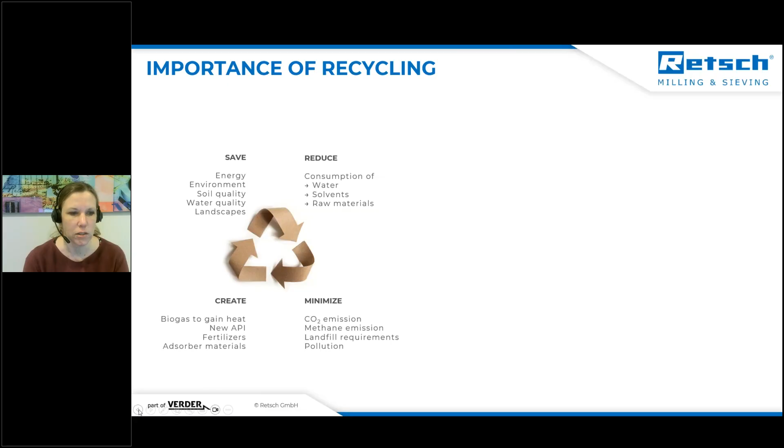The importance of recycling, I think, is clear. We have the aim to reduce waste and the consumption of water, solvents, and raw materials, to save energy, environment, soil quality, and landscapes. We need to minimize emissions, carbon dioxide, pollution, and landfill requirements. And of course, we'd like to create something new, new APIs for example, or new adsorber materials, and maybe we can also use biogas to gain heat. So the aims of recycling are very versatile and very urgent, I think, and it's a very interesting topic.

Where Retsch comes into play is when we need to analyze waste material. We need to homogenize it for quality analytics, quality control. This might be sieving, or it can also be, for example, a determination of heavy metals. And as soon as we know the material is okay for reusing, we need to crush larger sample materials, and here we also have some solutions for homogenization of the sample materials in larger scale.

Here we can see the topics of today: homogenization, standard deviation, the correct analytical values. Then I'd like to show you how to find the optimal method, the optimal mill for a specific sample. Suitable laboratory mills for homogenization, also for larger sample quantities, I will show, and then we will switch over to the demonstration of some of those mills in our lab. After that, we will have many application examples for best practices before we go to talk a little bit about sieve analytics.

Not in each detail—there are other webinars you can listen to where this is in focus, but maybe a short glance to this. And of course, also how to press a stable pellet for XRF analytics. And one slide on how Retsch mills can be useful in scientific purposes. And of course, if there's still time, some questions at the end.

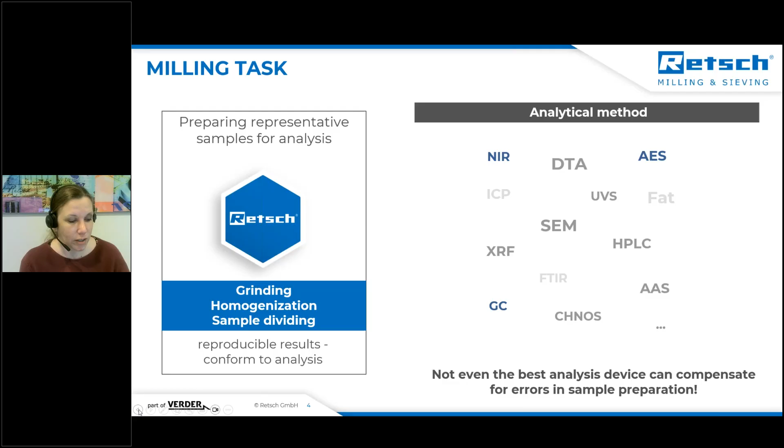And if you do not do this correctly, then you can put in as much money and time into your analytical device, but the results will not be that good. You cannot compensate for errors made in sample preparation with a very nice analytical device. So we know we are at the beginning of all these quality control steps, but it's required and necessary, and hopefully I have some slides to show you why.

For example, we have these Lego bricks, toy bricks, and now the goal is to get only a few, or a little amount, for the analytical task. If we do not grind it, then maybe we select to take a red one, but the red one might be of another composition than a green one, and so the result will not really be reliable, not representative for the complete sample, and also not reproducible.

So we need to homogenize it to mill it. And when we have this coarser fraction, if we take some milligrams, maybe this is okay. So we can try to analyze it, but maybe we have more green particles than yellow ones, or more blue ones in it. So it's really not that homogenized as it could be.

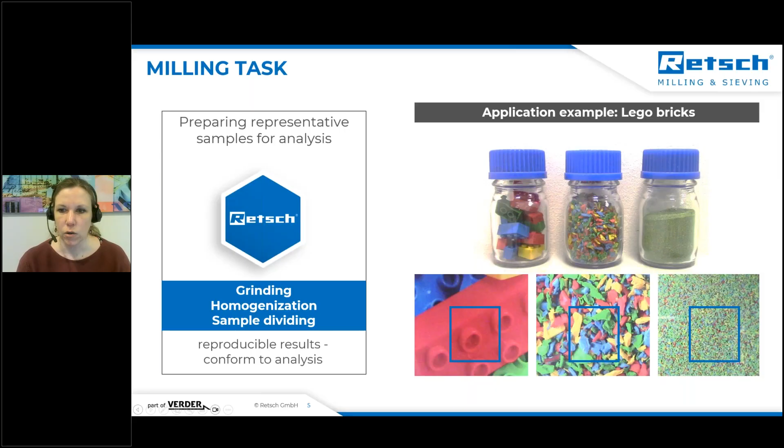As soon as we have it pulverized, it is completely independent where we take our few milligrams. The composition is always the same and contains the same amount of red, green, blue, and yellow bricks, and it is reliable - it really represents my original sample. So grinding and homogenization is really crucial to get reliable results in the end.

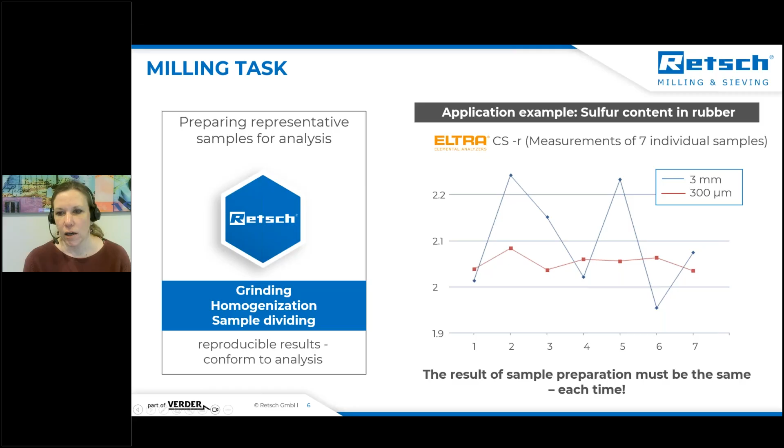This can also be seen in this example when we analyze sulfur content in rubber. We ground it in one experiment to 3 millimeters, shown in blue, or 300 microns, shown in red. We took different part samples and analyzed them. You see that the blue ones vary much more in the sulfur content. So this is not enough homogenization, obviously, because we get a higher standard deviation and more varying results.

It's not reproducible, so proper grinding shows good results in the end. We often get the task: okay, how fine do I need to grind my sample? And this is not the right question. Not as fine as possible, only as fine as needed - this is the really right question, because when we only need about 0.5 millimeter size to get reliable results in the end, then there's no need for grinding much more.

Then it's only wasting your time, your money, and maybe also your machine, through abrasion. So only as fine as needed, and not as fine as possible. The finer you like to get the particles, you need exponentially more time to create those.

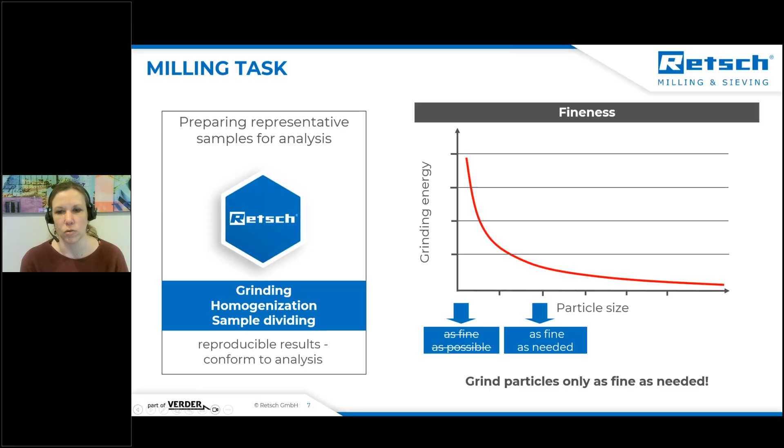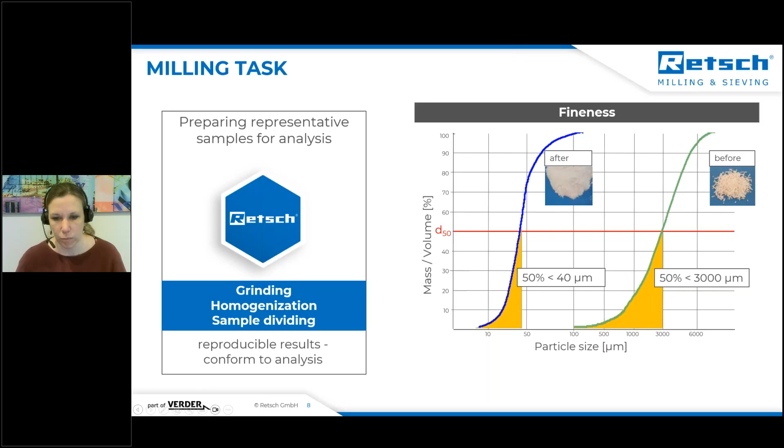And this is abrasion - we cannot avoid it. We can only choose the material of the grinding tools so that they do not disturb the following measurement.

This is also true for example for temperature increase, or heating the sample up front. Then we can maybe grind it easier, but if we like to analyze for moisture content, then heating is not good because it falsifies our results.

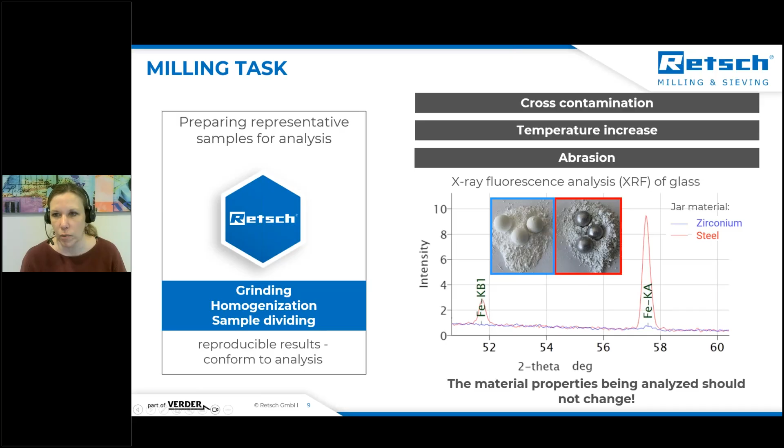Then I'd like to also show you how we can grind particles. We use 5 grinding principles. For hard sample materials, we use pressure. That's easy, I think - you just go through it and apply pressure to hard and brittle materials.

You can also use impact. So you take a glass bottle, throw it against a wall, and then you have the impact event, and it's pulverized, smashed. Then we can use friction for stones, but also for softer materials, to come to finer particles.

We can use shearing effects, like cheese, where particles are just sheared. This is not for hard samples, not for stone, but for maybe wood or softer materials. And of course we have cutting as well - again, not for stones, but for softer materials.

It's quite nice, and in our different mills and crushers, these grinding principles are used, single or in combination, to effectively crush or grind the samples.

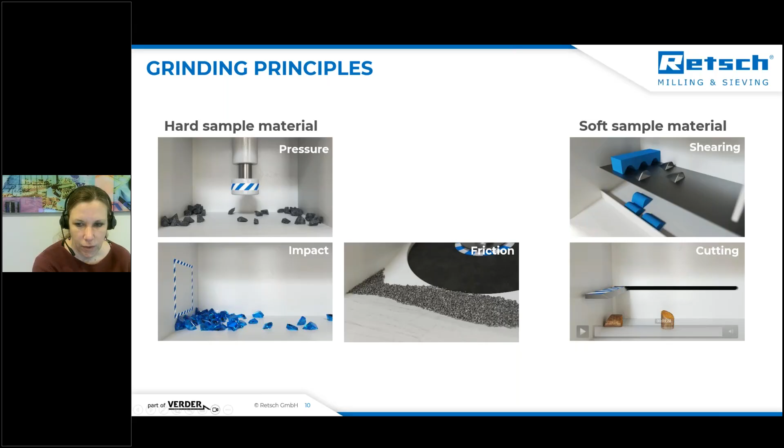Let's talk about our portfolio. We have more than 35 mills divided into different groups like jaw crushers, knife mills, or ball mills. For construction and mining materials, we'll talk about jaw crushers today, but also cutting mills, rotor mills, vibratory disc mills, and ball mills mostly.

I can't go through each in detail, but there are our web pages where you can inform yourself easily with different videos. I can show you how we pre-crush hard and brittle sample materials. There are jaw crushers, hammer mills, and cross beater mills - let's show you how the jaw crushers work.

You see that the material is just coming to the grinding chamber, and then the jaws are moved, and via pressure you can crush each hard stone. Then it is fine and is collected in a receptacle, for example.

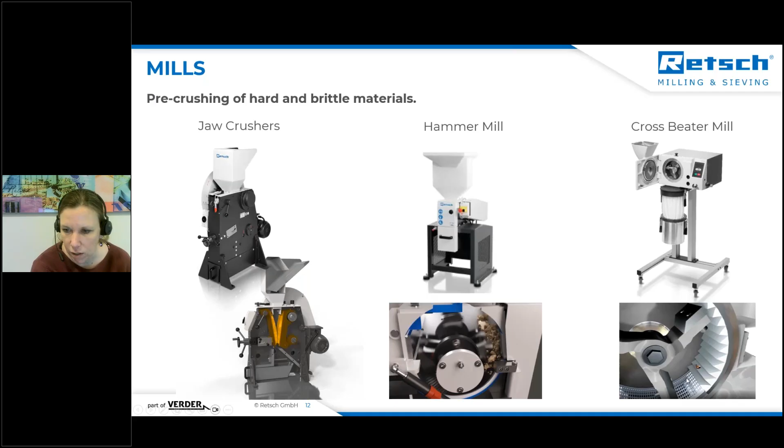Then we have the cross beater mill - I think there's no video for this one. The cross beater mill also works with this rotor and with impact, and as soon as a particle is fine enough, it falls through the sieve and is collected.

Then we have fine grinding of hard and brittle materials - planetary ball mills, for example. To show how this works: you have the grinding jars, you put in grinding balls, then put in your sample, close it, and put it in the machine, moving it on a circular way. There's a huge acceleration of the balls inside, and they crush the sample by impact and also by friction - this is a nice way to get pulverized samples quickly.

Here, in a nice picture, we have the vibratory disc mills, which are also shown later on in the demo part, so you can see easily how they work. You have the grinding bowl, and here you put in also a disc and grinding ring, and with movement of the grinding bowl in a circular line, you can pulverize the sample.

Okay, next slide now.

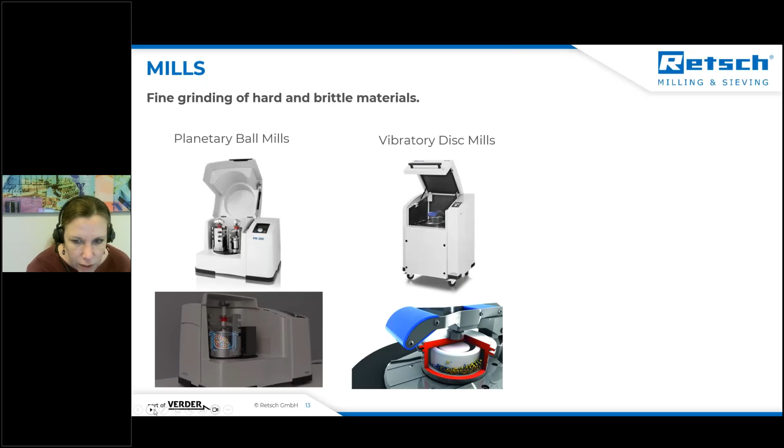Then we have pre-crushing of soft, elastic, and fibrous samples. Here we maybe don't need a jaw crusher, but for example cutting mills are quite nice. Let's talk about the cutting mills - here we have also a video.

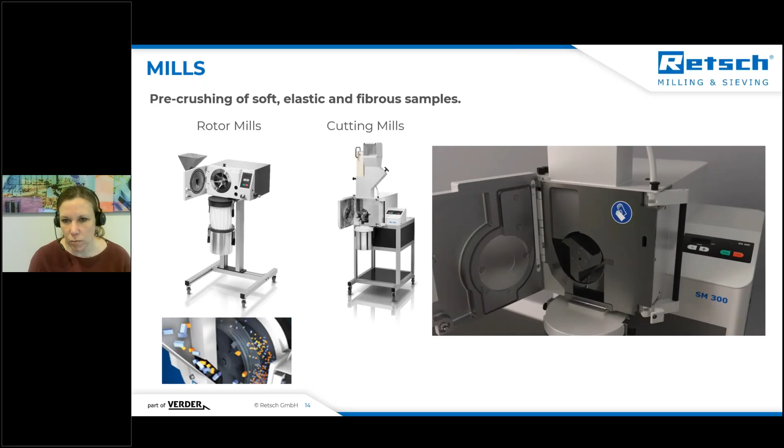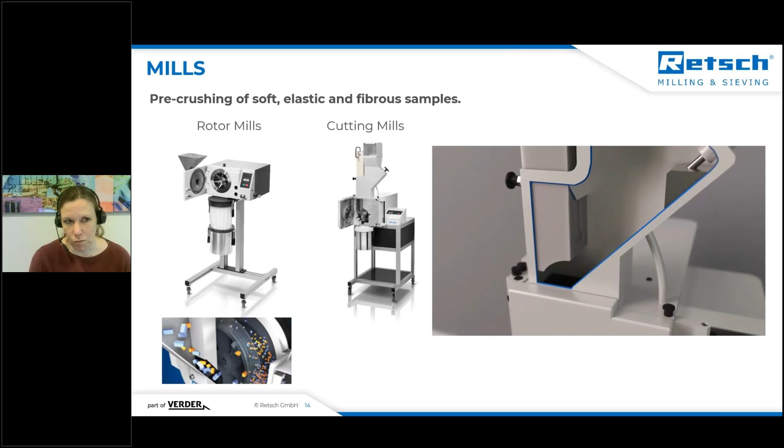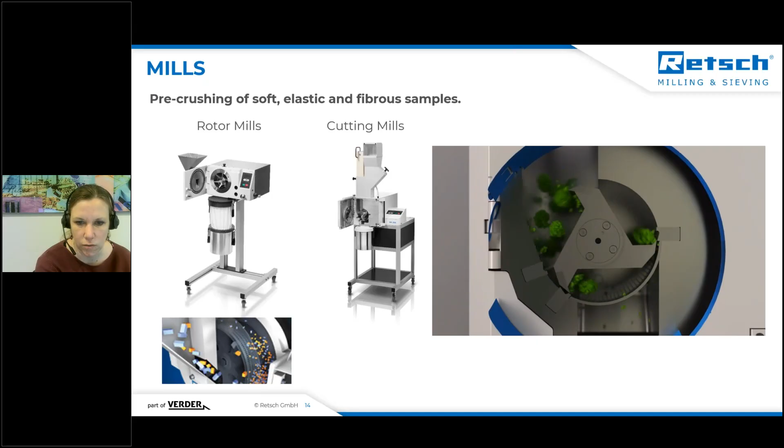Cutting mills, for example, are used to pulverize used wood or softer materials like glass wool. Here we use a rotor, but it's not impact - it is cutting and some shearing effects. When the sample material goes into the mill easily, it is cut with a rotor. It is not suitable for stones - if I throw in a stone, you will only destroy the sharp blunt knives and the stone will remain intact. This does not work, so it is for pre-crushing of softer materials.

Then we have fine grinding of soft, elastic, and fibrous materials. There's the ultracentrifugal mill, for example. Imagine the wood is pre-crushed into wood chips, maybe 10 millimeter size, and now you can put them into the ultracentrifugal mill ZM300. This video is with mace, but it can easily be wood particles. We have a rotor which is very fast rotating, up to 23,000 RPM, and everything coming to this rotor is accelerated very quickly and smashed on the teeth of the rotor. As soon as it's fine enough to pass the sieve, it is collected. So this does not work with stones, but for sample materials like wooden parts, it is very nice.

And of course, we have the mixer mill, again a ball mill here where the ball is trapped in a jar, and now it is moved from left hand to right hand side in horizontal movement, not in circular movement as I showed previously with the planetary ball mills. Everything here is mainly crushed by impact - glass particles, stones, and so on. So really a useful instrument.

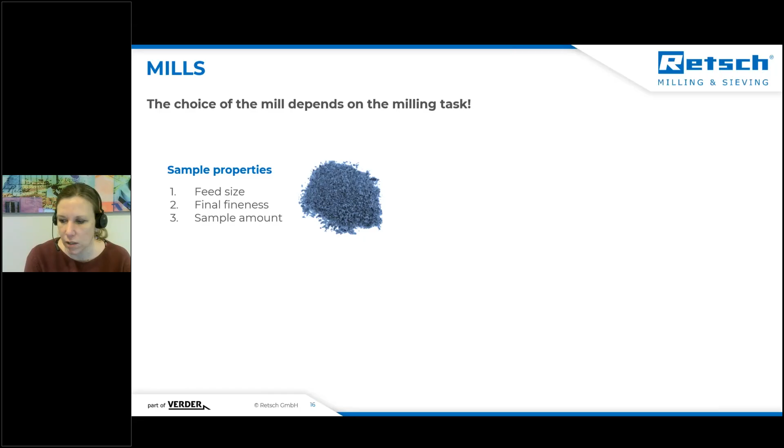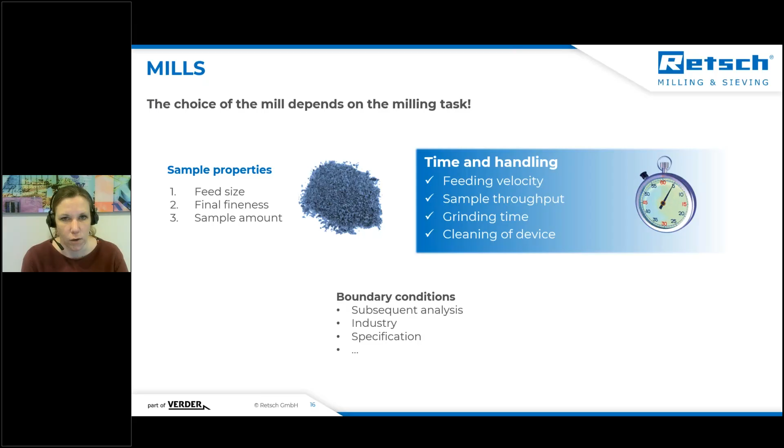The choice of the mill depends on the milling task. You need to consider the feed size, the final fineness, and the sample amount, and then you come to a good pre-selection of the machine. You also need to have a closer look on the time and the handling - what is my feeding velocity, what is the sample throughput, the grinding time, and how much time do I need to clean the device? We try to make them as cleanable as possible, but we cannot avoid cleaning tasks completely. We have some boundaries - subsequent analytics, industry specifications - which may tell you which machines you have to use. And the right accessories are also very crucial.

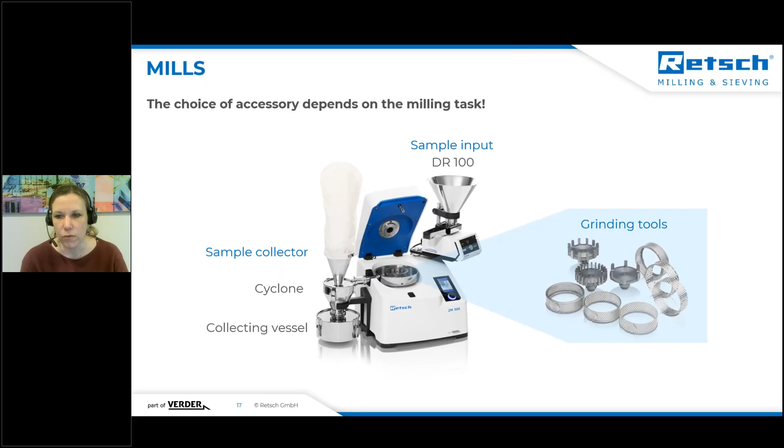For example, for sample feeding, as I have shown you in the video of the ZM, we can also use a different collecting system with a cyclone separation unit and another collection vessel, which allows for maybe 5 liter collection instead of only 300 milliliter. And of course, we have the different grinding tools which allow me to adapt it to my specific sample.

When we're talking about abrasion, we have to talk about the different tools and the different materials we have for the tools. For grinding tools and ball mills, we have different materials for the jars and the balls, for the rotor mills mainly the rotors, and in jaw crushers the breaking jaws. This has really an impact on the abrasion I get. As I told you before, when I try to avoid or need to measure heavy metals or iron content, then I should maybe not work with steel materials. I can then choose tungsten carbide, or hardened materials, or zirconium oxide, for example, to avoid this metal abrasion.

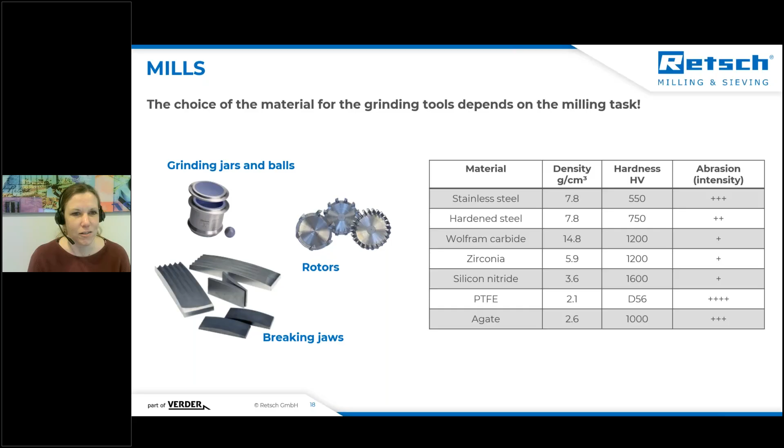And we need to talk about the density, because when I need to grind a very tough or very hard material in a ball mill, I need a certain energy input, and I cannot get this with a material like agate, which has a low density. It cannot be accelerated that much, and it will not smash the hard particles. You need stainless steel or tungsten carbide. The hardness is also important - when the sample is harder than the material I use to grind it, then I have a problem. So always choose a grinding material which is harder than the sample.

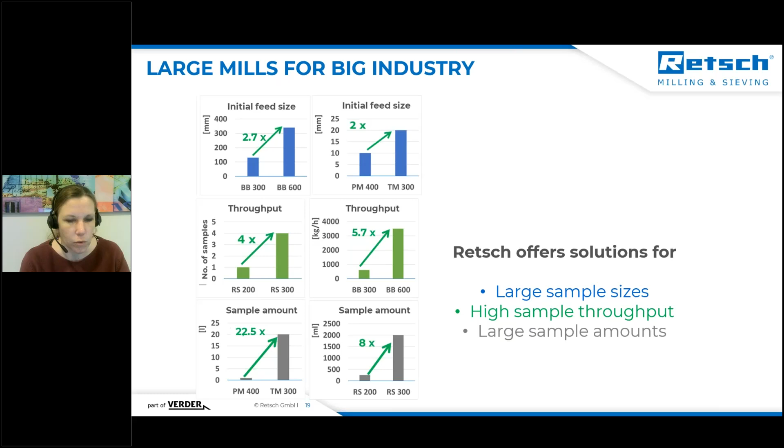We also have some mills which have the option to grind larger sample sizes or work with higher sample throughput and large sample amounts. The BB300, BB600, for example, are a good choice when I need to go for a larger initial feed size. Also, the TM300 allows for doubled initial feed size compared to PM400. Sample throughput is also interesting in the larger jaw crushers, or in the RS300 compared to the more commonly used RS200, because it has larger vessels - you will see this in a few minutes. And for sample amount as well, the TM300, RS300, BB600 are the choices where we can really grind or cope with larger and bigger volumes.

But some words about sample preparation - sample division is very important as well to be considered. Later on, I also have a slide for the PT 300, but now some theoretical, not only theoretical, but some data.

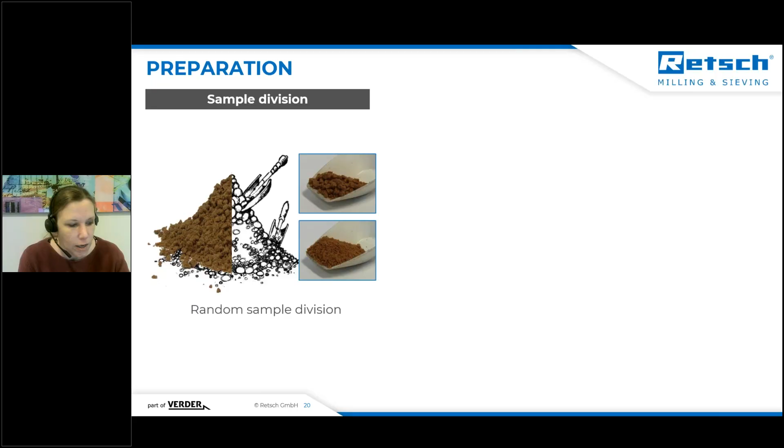Here we have the task that we can only analyze a part sample of a heap of sand. If we only take randomly a part sample, maybe one takes one from the top, one from the bottom, and then one has larger particles and the next has smaller particles. Who tells me the composition of these particles is the same? So maybe we have sample segregation here just by taking a part sample, and this is a problem because it will affect my analytics.

This means we need to talk about sample division as well. Giving you some values we've seen over different materials and methods, here's a rough estimation of what we saw over the past years: with random sampling, you get a standard deviation of about 10%. You haven't ground anything, you haven't analyzed anything, just by the wrong sample division you get this deviation.

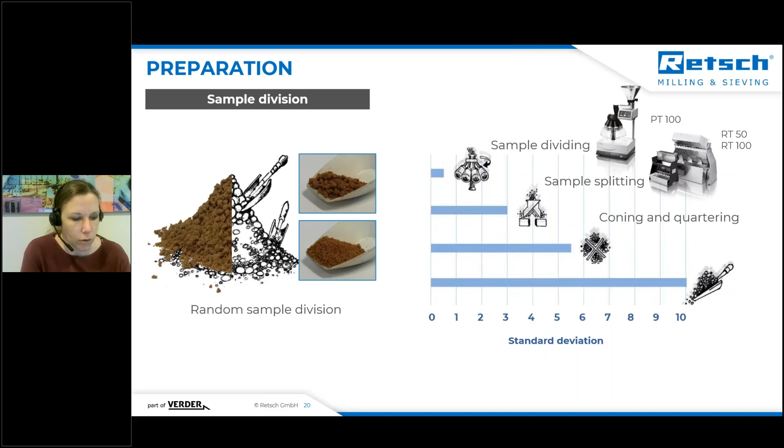You can use coning and quartering, then it gets a bit better. Sample splitting, then it gets also better. And by automatic sampling or sample dividing using our PT100, PT200, or PT300 for example, you can get the standard deviation to less than 1%. So really reliable and really reproducible.

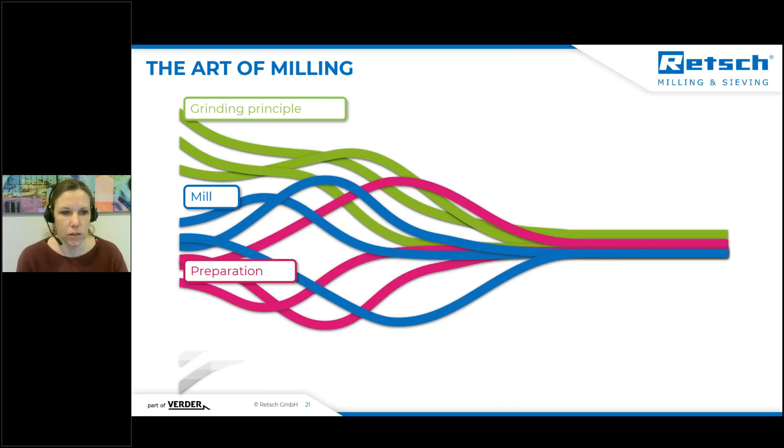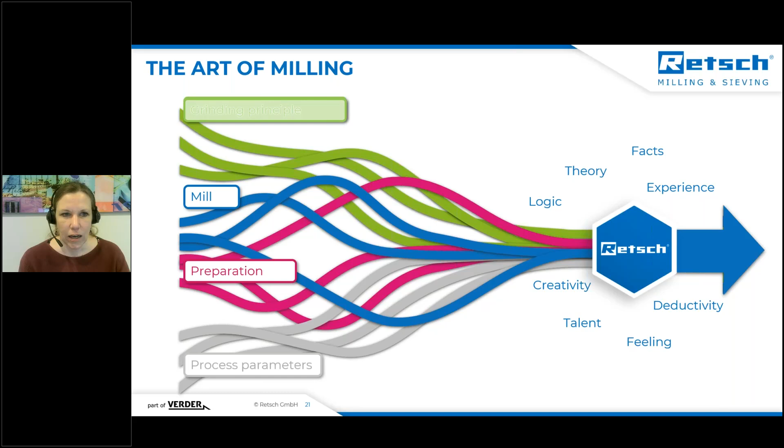Okay, I think this was a quick overview about grinding principles, the mill, sample preparation, and process parameters, which gives you a good feeling about having the choice for your sample. And I think now it's time to go into the lab for a little live demo before we go back to the slides with many application reports and also some words about sieving.

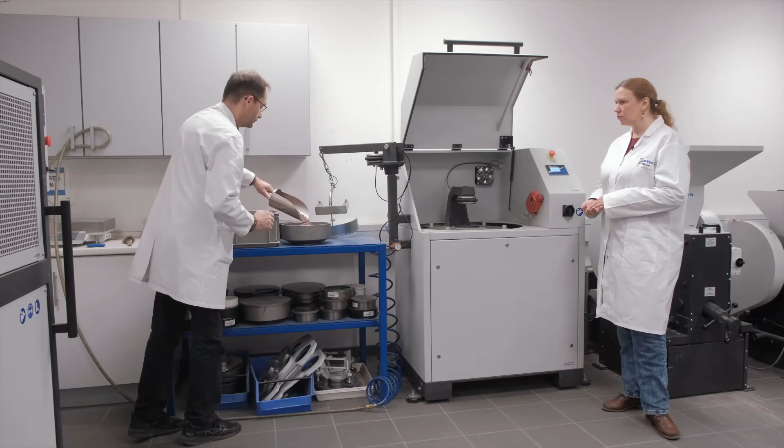So it's filled in, just to show it better. It's now around 1 liter of sample, which I've placed in. Then the lid is placed on, and inside this grinding set there is a disc which is free, can move freely, and just slides inside. I will now show how this machine is working.

Putting the grinding set into the mill. Very good to have this unit because it's a very heavy piece. Yeah, that's great.

For demonstration reasons, I think we will not grind too long here because it makes no sense to go for up to 5 minutes. So we'll just do it for 1 minute to see how it works and what fineness can be achieved. But for really fine grinding down to less than 100 microns, you maybe need more than the 1 minute we will do here. Normally 3 to 5 minutes with this unit.

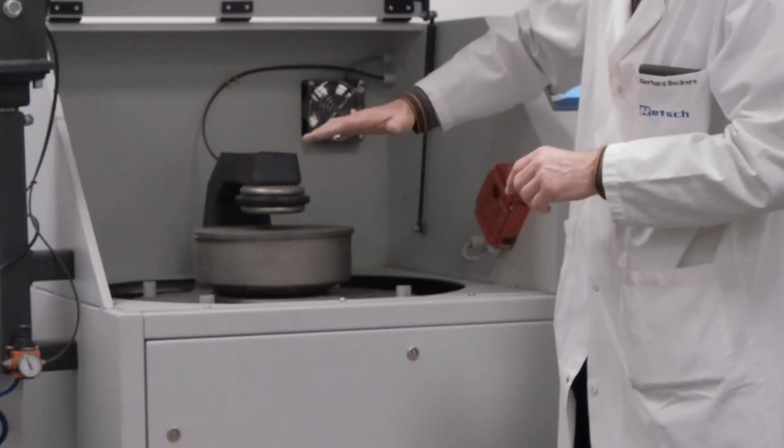I'll explain how this is working. We've got the holder here for the grinding set, which can move freely, and underneath this motor, which rotates this piece, so it's just wobbling around, and then the disc inside this big grinding set slides inside, creating a lot of friction and grinding everything in its way.

Here's pressurized air which presses this piece down to the grinding set, and then it's fixed properly inside the holder. This is done when the unit is closed. You will hear this now when I lock the unit. Now there's the air coming in, and now it's fixed properly. And then I can start the whole unit.

This will now take a minute, so don't worry. You will see when it's finished. Starting rotation, I will explain later on. It should be a bit noisier. Oh, that's fine, maybe it's already fine enough. About 30 seconds to go.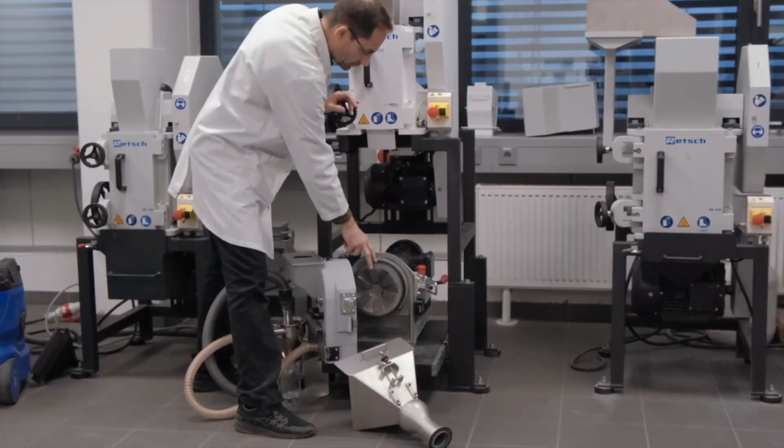And it's fixed with the latches here. So the sample comes out down here and can drop into the hopper, going into the disc mill shown underneath. We've got a rotating disc - the sample comes in from the door here and is ground by friction between the two discs.

I will now close the door and slide back the whole machine so you can see how this is done. Adjusted, and then you've got the hopper placed on here - fixed and connected to the unit. Okay, so we'll close the machine now and start the disc mill.

Attach it, and then we start the jaw crusher. Now I've got a sample of simple glass, which I will drop in - this piece of glass has sharp edges, so be careful.

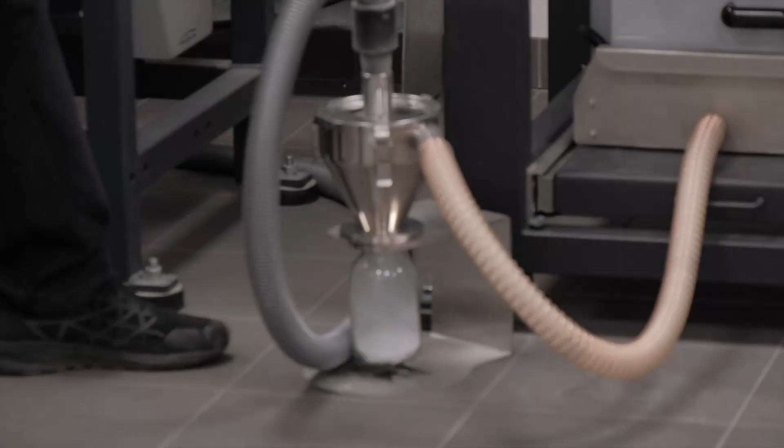So this will be dropped in here. This one is finished.

Just stop it - it's not completely done, but as you can see, it's connected to a vacuum cleaner, to a cyclone, and here we can collect the sample in this glass. It was really quick also because there's no intermediate handling time, it just flows through.

So now I will show the sample here. We've got the initial - this is a brick as before, and another one, of course, which is a sample after grinding.

You can see, without lots of dust, we still create very good fineness, where the disc mill goes down to about 100 micrometers. So in principle, in the RS we can get finer particles than in the DM200, but I think for this reason it's okay here.

I just wonder what happens if we really want to grind large sample capacity. We have this small glass, that's fine, but we are thinking of larger sample capacities for recycling especially. Here for the demonstration I just used a 500 milliliter glass connected here to this stand.

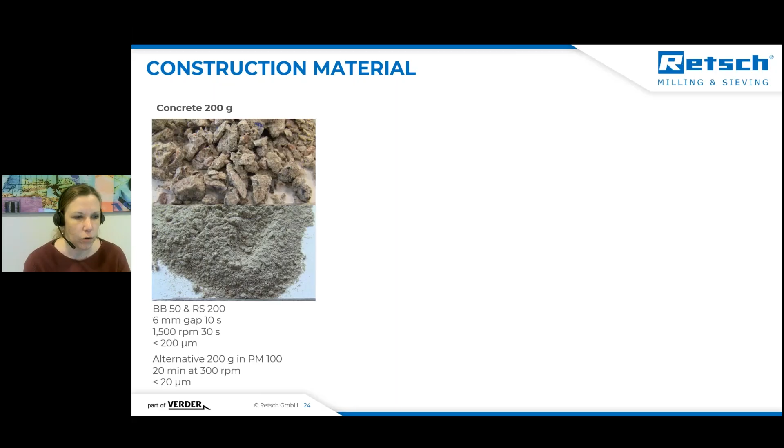But it is really impressive, I think, to see the before and after pictures. For example, construction materials like concrete, pre-crushed in the BB50 and fine ground in the RS200, then you get a really fine powder of 200 micron. This large stone or brick, 10 centimeter feed size, was ground in the BB200 and fine grinding in an MM400.

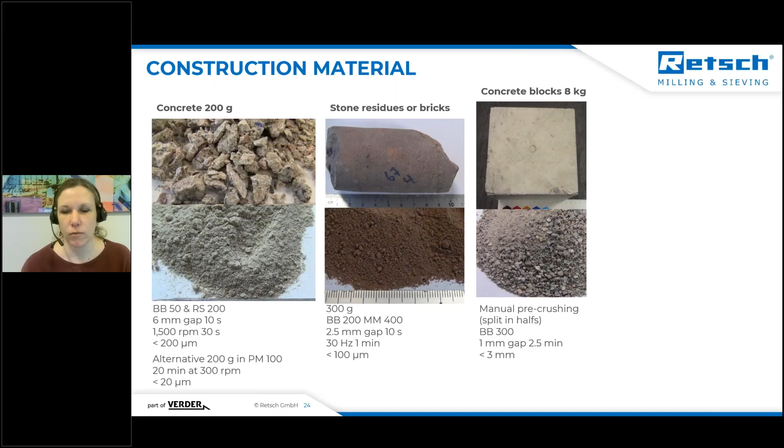This is also very nice and impressive because in less than 2 minutes in total, you can come to a very fine powder. Concrete block, 8 kg. This is too large to be thrown in a jaw crusher, for our jaw crushers at least, but when we just divide it once manually, we can put the halves into BB300, and here also we have nice pre-crushing.

Or asphalt. Asphalt is really nice because it sticks. It has bitumen, and this can really make your horrors because you find it everywhere and you do not grind it, you just flatten it or stick it. When you use liquid nitrogen and embrittle this sample for the pre-crushing in a jaw crusher, then you can really pre-crush the sticky material.

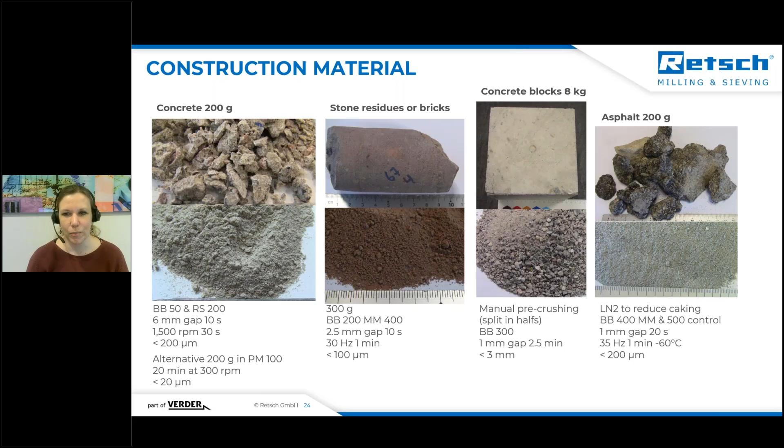And when you then use for the fine grinding step the MM500 control, for example, you can also embrittle the sample during the grinding in the fine grinding step. You won't get any sticking effects. So this is really a nice thing. With a sticky material, always think about liquid nitrogen, and if it's available to be embrittled, then the pulverization can also be performed, even in this case.

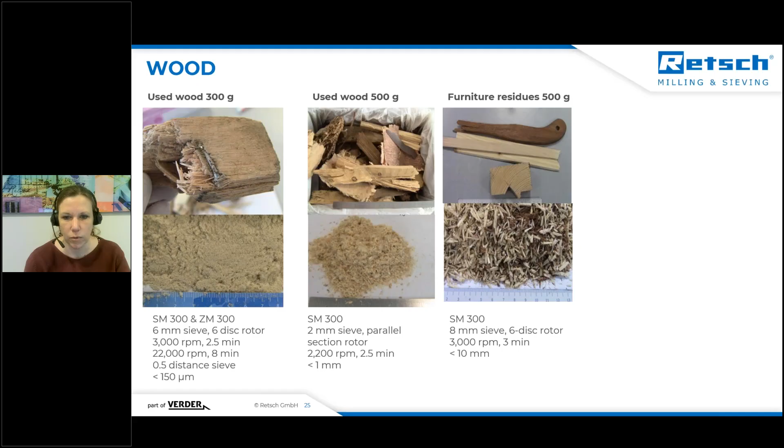Wood is tough, wood is fibrous, but when we go to SM and ZM, for example, then we can pre-crush the wood or pre-grind it and fine grind it to, in this case, 150 microns or below 1 millimeter coming out of the SM. Or we can grind furniture, for example, 10 millimeter particles ready to be fine ground in a ZM. Or we can directly, if the wood is small enough, go into the MM400 and pulverize it to 100 microns.

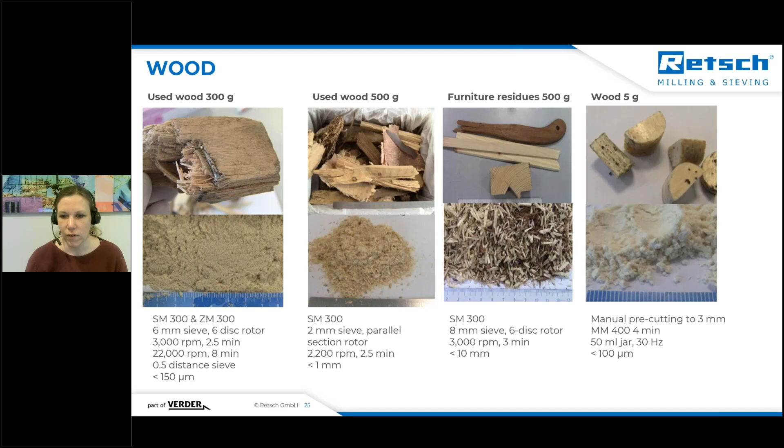Glass is also common in construction materials, maybe not glass bottles, but glass parts of windows or whatever. Just as an example, you can use the HM200, the hammer mill. This is really nice for the glass sample, coming to 2 millimeter samples.

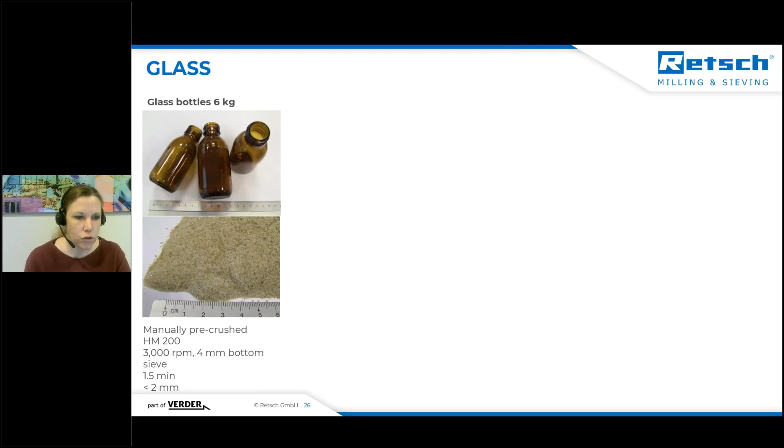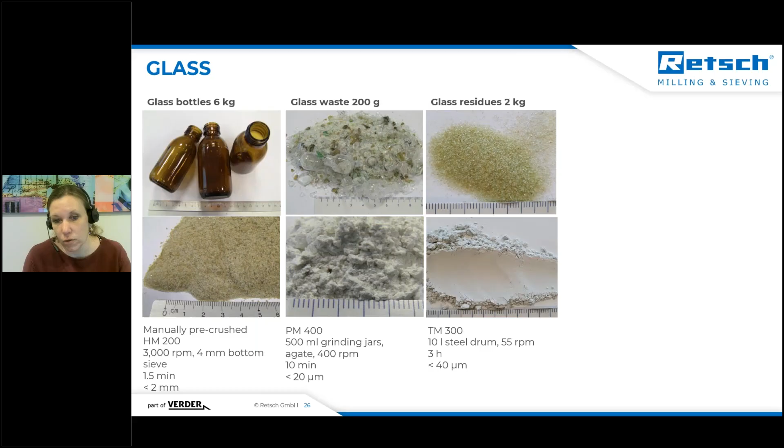Glass waste in a PM400, really finely ground to 20 micron particles, or 40 micron in TM300. This takes a bit more time because there's more mass and the energy input in a drum mill is not the same as in the PM. But in the end, after 3 hours, you have around 2 kg of this sample.

And glass wool as well, in a SM and then in a MM400, down to 30 microns and let's say less than 7 to 8 minutes in total.

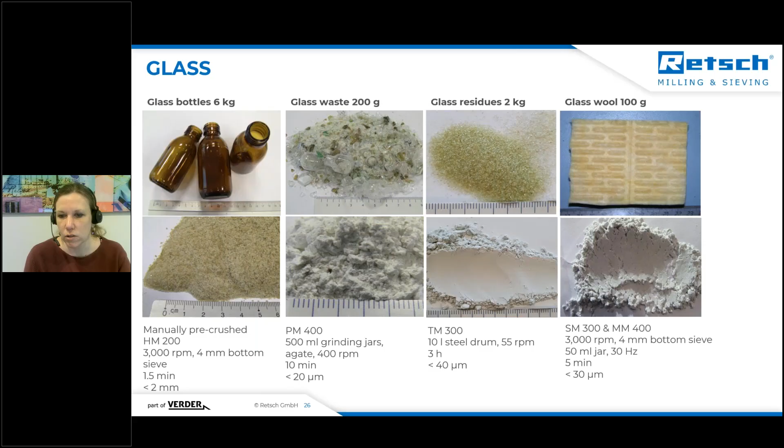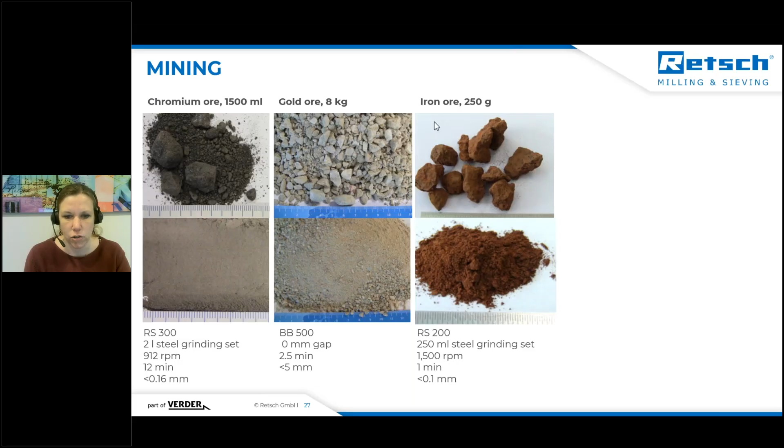For mining, we have chromium ore in an RS300 finely ground, gold ore in a BB500, for example, pre-crushed iron ore in an RS200 finely ground, another iron ore in a BB200 and then an RS200. So also very nice examples.

And then we have also some examples for ceramics, very hard material, tungsten carbide. This is nice. Here, of course, you need also tungsten carbide jars when you try to crush this, because if you have steel tools, this will not be nice.

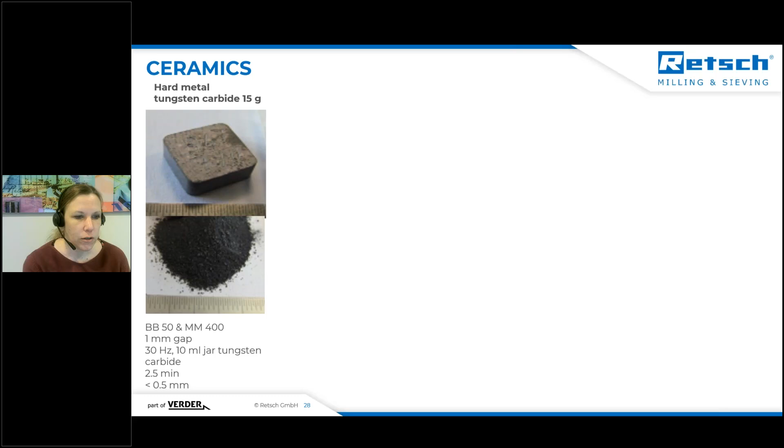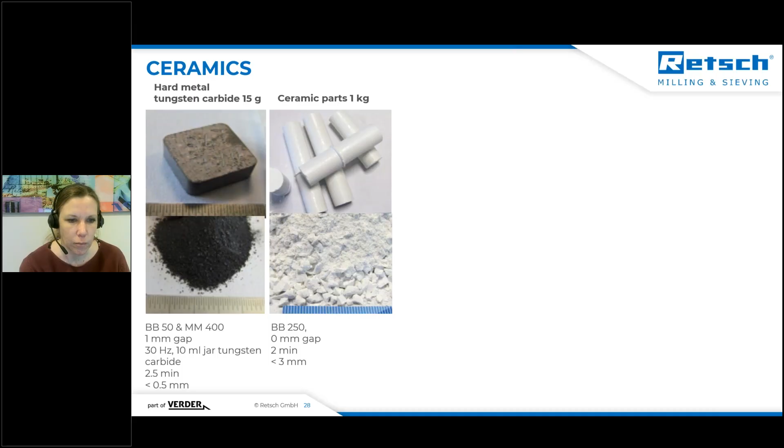BB50 and MM400 was really cool for this kind of sample. Ceramic parts in the BB250, so the jar crusher, which was shown in the combo unit with the door, you can really come to 3 millimeter particles over here. As well for the ceramic green bodies, 100 microns when you use first a BB and then a DM200.

And spent catalysts as well. You can fine grind in just 4 minutes using the BB250 and the RS300.

Okay, I think I could give you much more particles, much more pictures. This is a selection. I hope you will find your sample materials as well over there. But I also like to tell you something about sieving, splitting, and pressing, because it somehow also belongs to this complete topic.

And then let's start with sieving machines. We have 9 models in our portfolio, and we work with 4 different sieving methods. You can see here, in orange, the AS200 tap, which works with tapping. Then in violet, AS200 jet, which works with an airstream, and for larger sample materials as well, the AS400 control, which works with horizontal movement. And the remaining others, they work with 3D vibration mode, so that the particles are not just moved in a circular way, but also thrown in the air and can reorientate.

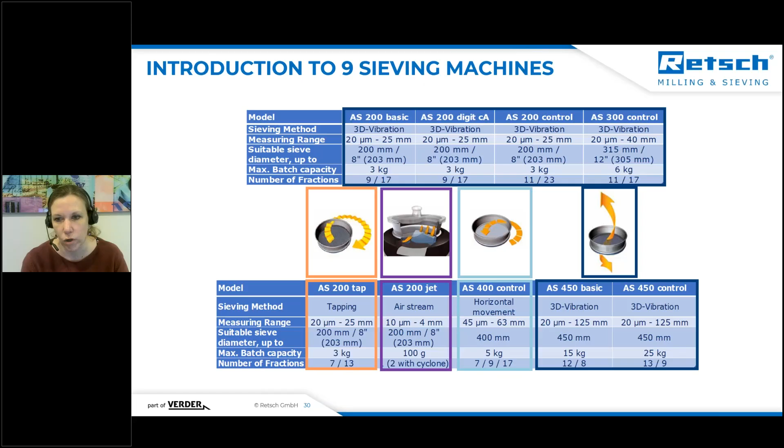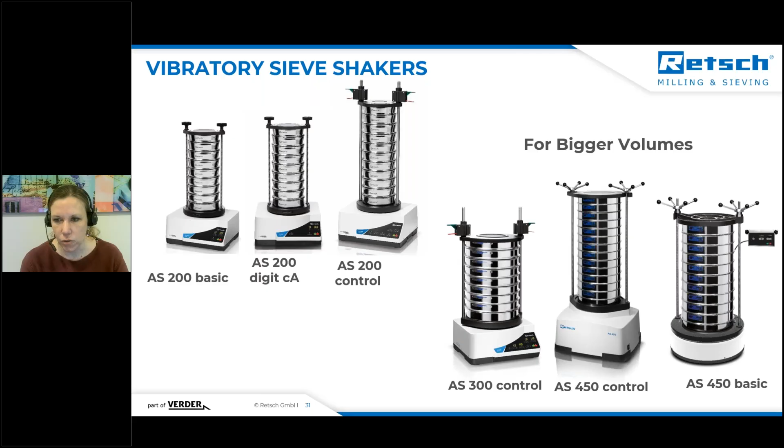And you will see in the slide that this makes a difference to some samples if they use one sieving method or the other. But let me just show you the sieve shakers, small ones, and the ones for bigger volumes, which are used for recycling purposes as well, I think.

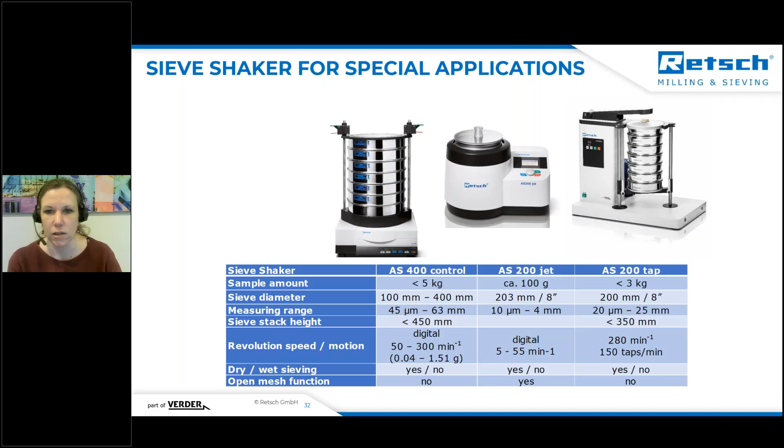And the special ones for tapping, horizontal movement, and deagglomeration of some ground particles, and for fine particles, this is the AS200 jet. But you can see this on our webpage. This is easy to find and to see what are the different features of the machines.

But what is really important is to give you an impression about how to sieve. Here's just a short overview. There are lots of other recordings for sieving which give you all details, but here we have to talk about overloading a sieve.

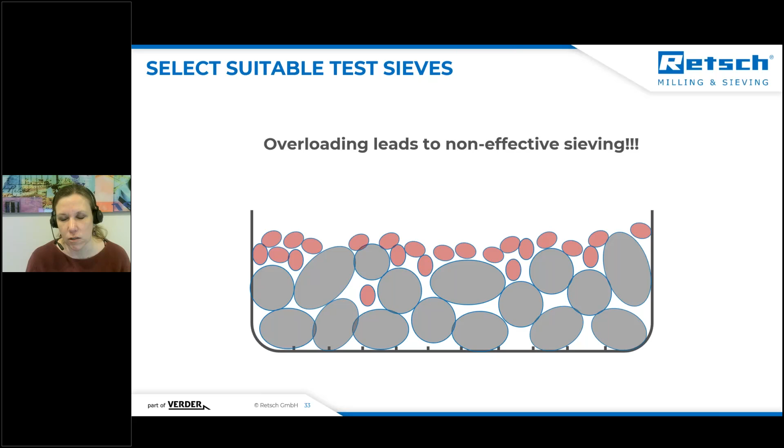Because when you overload a sieve, you won't have any effective sieving anymore. I tried to draw this here. You see that the large particles are just blocking the pores of the sieve, and the small ones, which could pass the pores, do not reach the pores because they are laying above the larger ones. This is not effective, because you will consider these as large particles as well when you weigh the sample back.

And this means we need to talk about how to find the right sieve for my sample. This needs to be taken into account for two aspects, according to DIN 66165. We have to talk about maximum particle feed size, which is allowed per distinctive sieve. For example, with the formula shown in this slide, we have a 250 micron sieve. How large can the particles be which I put on this?

You put the sieve size, or the sieve aperture size, 250 microns, in this formula as shown, and then you come, for example, to about 3.8 millimeter particles. This means particles which are larger should not be put on the sieve, because then it's getting not effective anymore.

If you have 4 millimeter, 4.5 millimeter particles, use first a 500 micron sieve or 1 millimeter sieve to separate the large particles, because then it's getting effective.

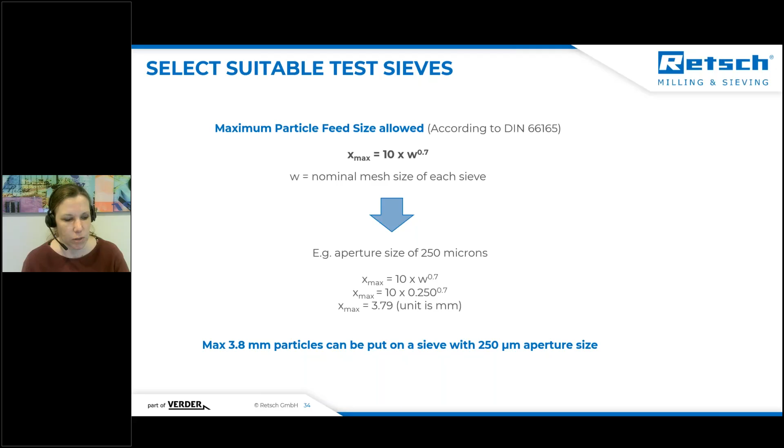And also, how much sample do I put in? Can I completely fill the sieve and then start sieving? No, this is also not correct. Here we have another formula where you put the sieve diameter, the mesh size in millimeters, and the material density, and then you get the maximum permitted remainder on the sieve. So what sample material is staying on the sieve after the sieving process? When you double this amount, you have approximately the initial volume you are allowed to put on the sieve.

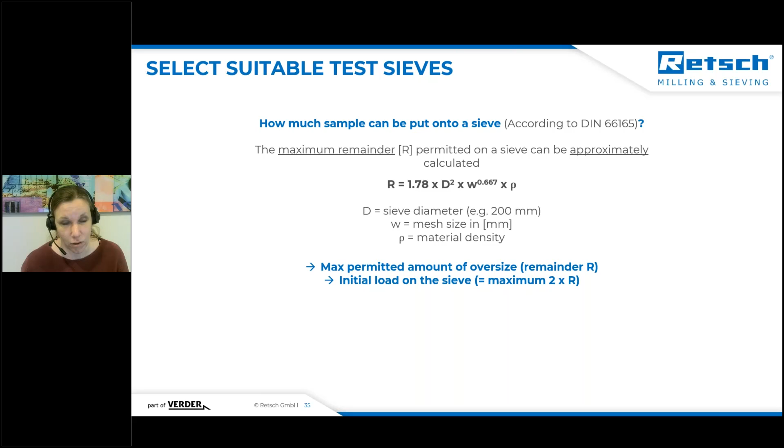This gives you also a kind of feeling for how much sample can be loaded on a sieve. First, to assure effective sieving, and second, not to overload it, because when you put too much sample on, you can simply destroy it, as the woven mesh can be damaged when you put too much weight on it.

Okay, and then we have also to talk about equivalent diameter. Suppose you have a sphere, your particles are round, for example 1 millimeter. Then you can watch it from different viewpoints, it's always 1 millimeter, and that's its real size. So the equivalent size is the real size.

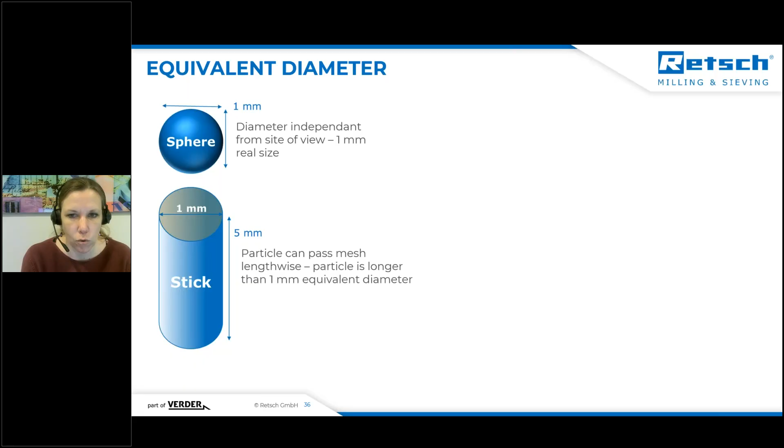But if you have a stick with diameter 1 millimeter but length about 5 millimeter, then the particle is longer than its 1 millimeter equivalent diameter. It can pass through a 1 millimeter pore size, for example through a mesh with 1 millimeter size, because it fits through lengthwise, but it is 5 millimeter in length. This means the equivalent diameter is not the real diameter, not the real size, let's say it like this. The coin makes it more obvious again, because a coin of 1.3 millimeter size can also fit through this 1 millimeter mesh size sieve.

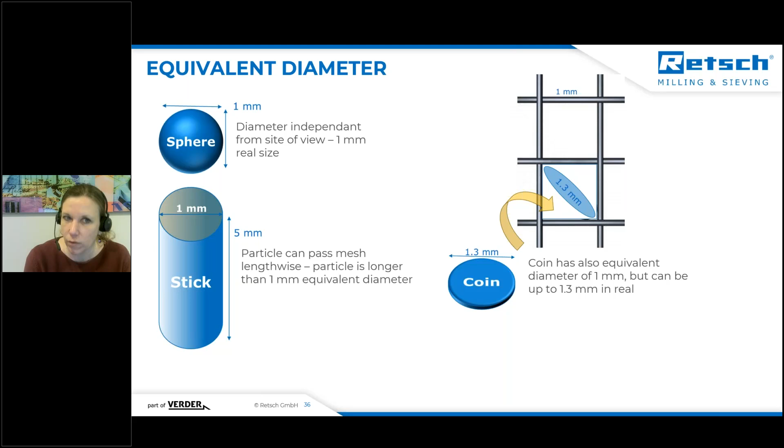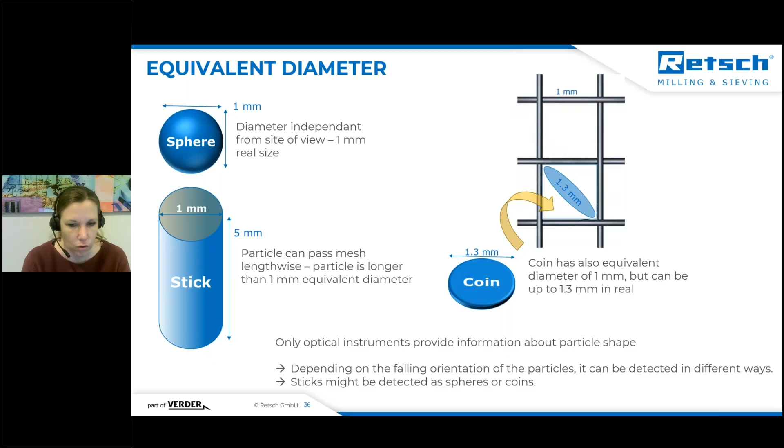It seems that it is finer than 1 millimeter, but it isn't, because it's 1.3 in diameter. So be a little careful with the shape of the particles, and consider the equivalent diameter versus the real size. If you like to distinguish between this, you need an optical instrument to provide more information about the particle shape, since sticks might be detected as spheres or coins, which could falsify your results.

If you use horizontal sieving, the particles stay on the sieve because they do not change their orientation. They just slide on the sieve because it's not a 3D motion. It's just horizontal movement, circular, and then they seem to be as real in size as they actually are.

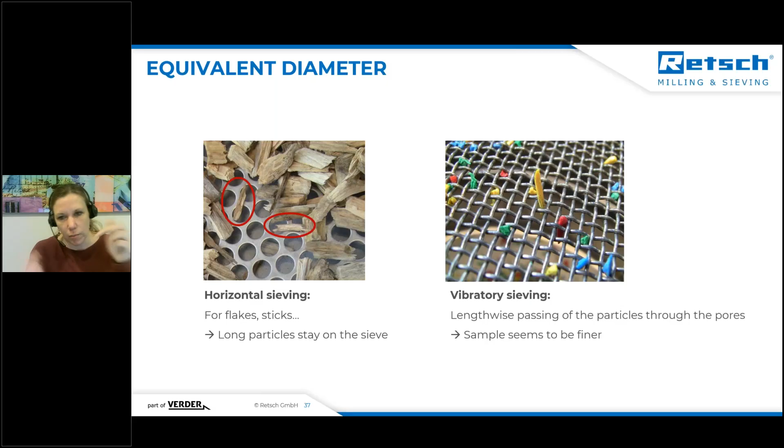But if you use vibratory sieving, as shown with the elongated plastic particle here, you see that by throwing the pieces into the air, they can reorient and pass lengthwise. And this maybe falsifies your results.

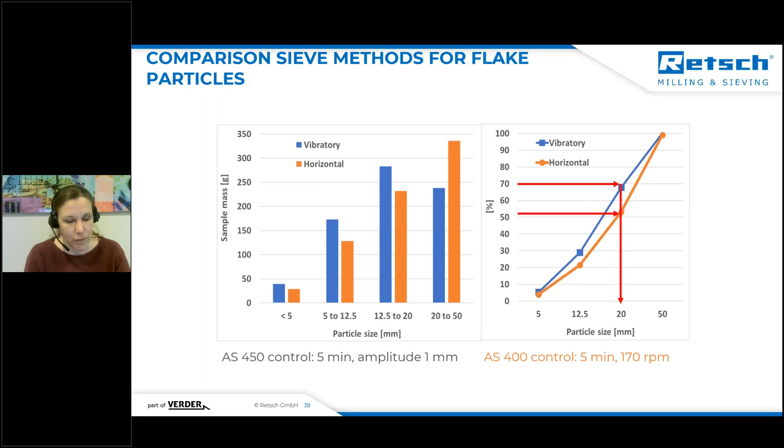You can see this same sample material sieved in different sieving machines with different sieving methods makes different particle size distributions. For example, the wood chips here with the AS 400.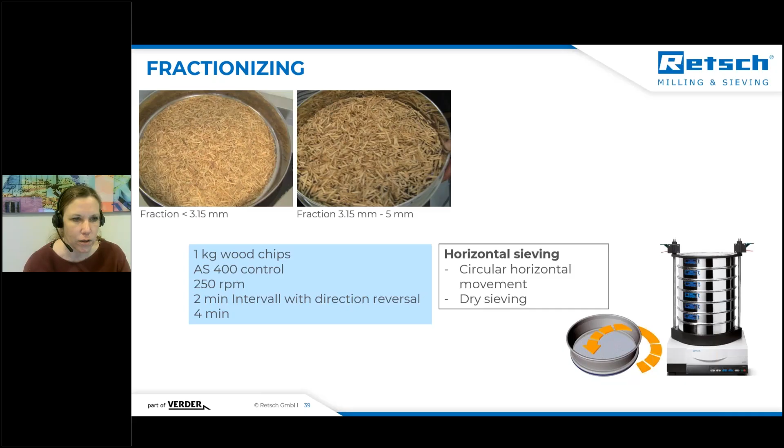Here you can see that you can also fractionize it correctly with this sieving machine. On the left-hand side you have the finest particles, and on the right-hand side you have the large fraction, 3.15 to 5 millimeters. That's the right choice to separate and fractionize those elongated particles.

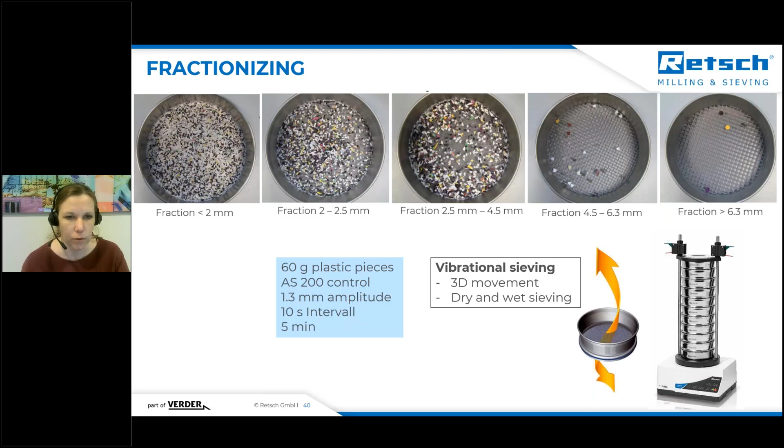On the other hand, for plastic pieces you can use vibratory sieving, because they are more round, and that's a good way to sieve this one. So 2 millimeters, less than 2 millimeters on the left-hand side, and on the right-hand side a large fraction larger than 6.3 millimeters. Just an example for fractionizing such a sample.

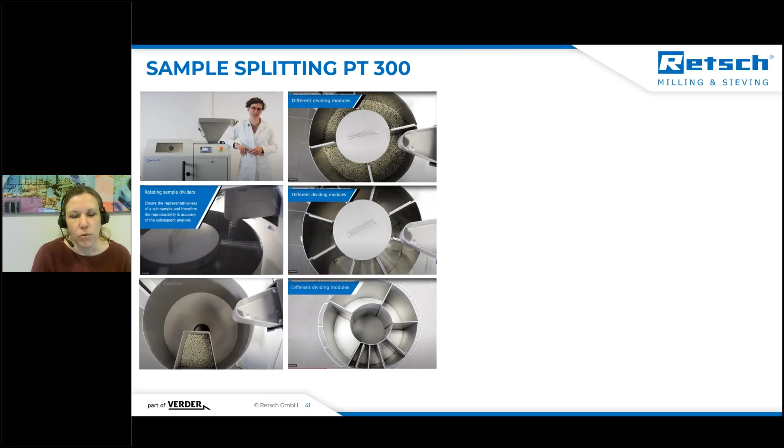You can put in a segment with 4, or for example 6 or 8 different compartments, also with different volumes. But what's important is that because of the constant sample flow, you have the same composition of the sample in each compartment. The volume can differ, as in the last example, but the composition is the same in each one, in terms of percentage for example.

If you have the task, for example, to pre-crush and fine grind some material, then good sample splitting in between becomes crucial. So if you have a 60 liter sample, for example, which can be used in a pre-crushing step in the BB50, you get this pre-crushing.

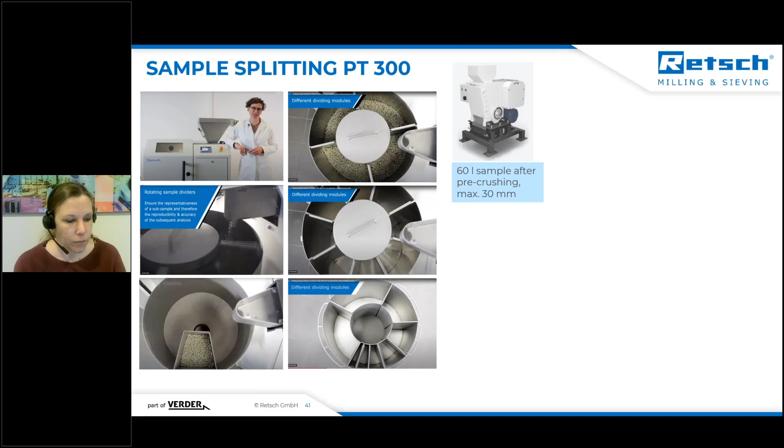Then the maximum feed size for the PT300 is 30 millimeters, so you need to crush it to less than 30 millimeters in the jaw crusher. Then you can take, for example, the 60 liter configuration of the PT300, and now we have the different compartments you can put in. If you take the one which splits it into 4 segments, you still have 4 times 15 liter sample.

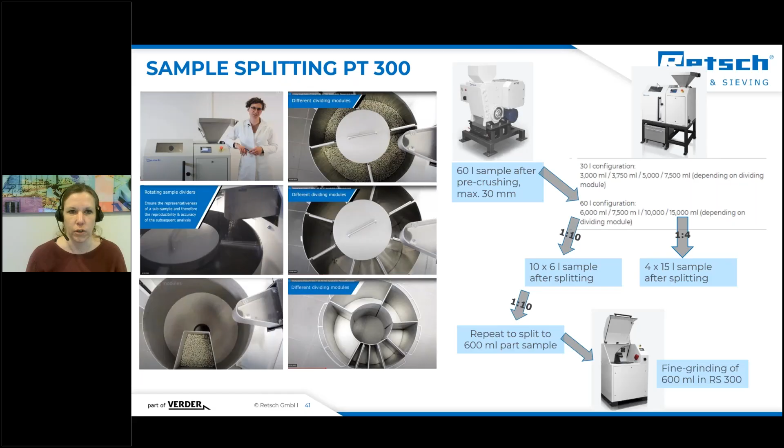This is a lot of material for fine grinding, unless you go to a TM300. But you can also use the compartments which split it into 10 part samples, and then you have 10 times 6 liter sample. Then you can take one of these compartments and split it again, giving a 600 milliliter part sample, which can easily be fine ground in the RS300. So here you can go, for example, from pre-crushing over sample splitting to the fine grinding step.

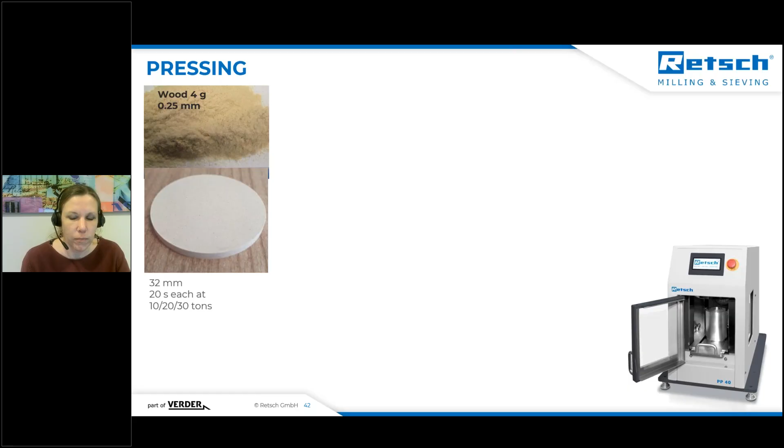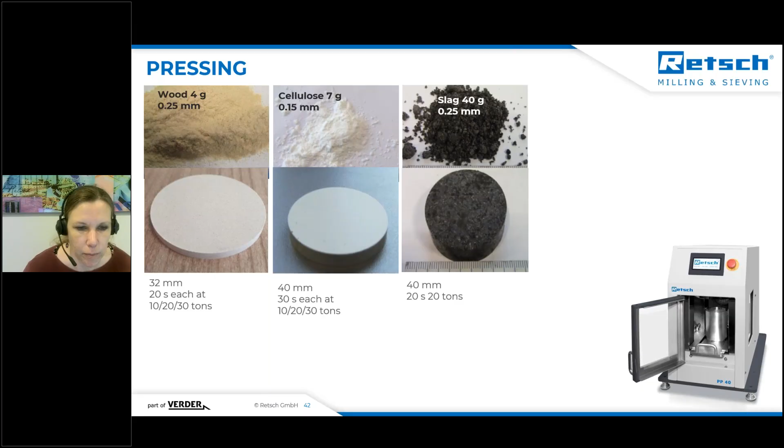I forgot, there's one more slide, the scientific one: sample pressing. We can use our PP40 tabletop machine to press smooth pellets for wood, cellulose, or slag for example. Here you see we get stable pellets with smooth surfaces for XRF analytics.

And in a really short time, we can do it stepwise, by increasing the pressing force from 10 to 20 to 30 tons for example, or if only one pressing step is needed, as in the case of slag.

And sometimes, even when we do what we want, we won't get a stable pellet because it just comes out of the machine and is pulverized again. But in this case, we can use Licowax to stabilize the pellet, so we mix our sample in a specific ratio with Licowax.

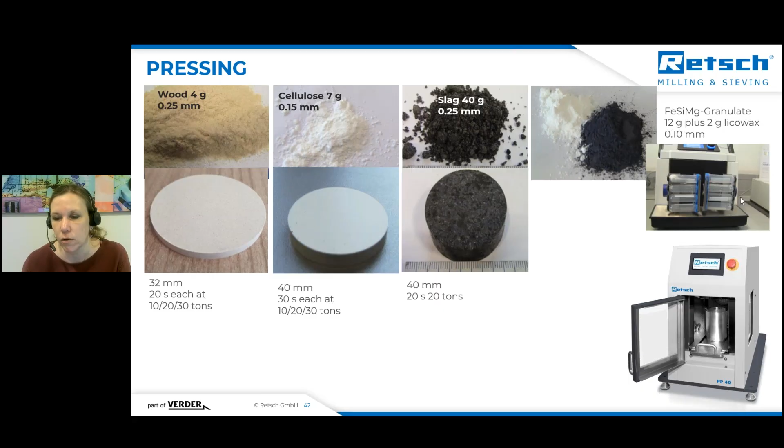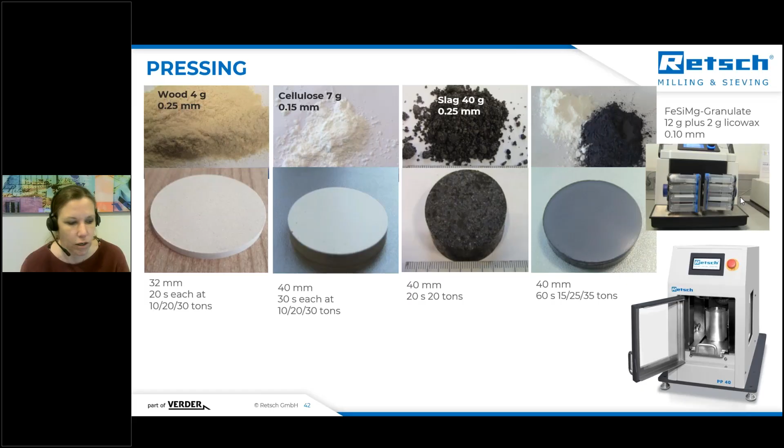We can do it by hand manually, or we use our MM400 with a vortex adapter, where we just do the mixing automated in an automated way and quite quickly. And then we take one of these flasks, put it into the PP40, and then we get also a stable pellet over here. So maybe a nice tool to facilitate your daily work.

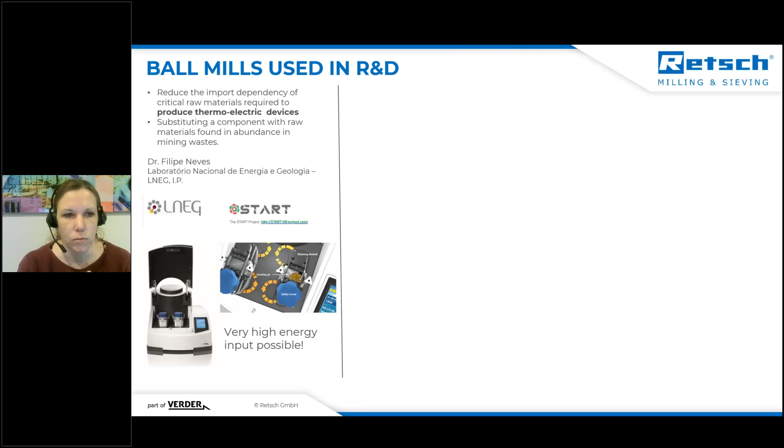Okay, then the last slide, the way we use or where the Retsch instruments are used in R&D projects. There's one R&D project which uses the high energy ball mill Emax, which gives really high energy input so that it is able to crush the hardest materials. This is used for mining waste, and then some of the mining waste ingredients are then used in new thermoelectric devices. And of course, this helps to minimize the mining waste. This is a nice project, I think.

Another one is using the PM400, where, for example, porcelain is recycled and repressed into new porcelain. And this study aims to find out if there are differences to the traditional way or not in terms of quality, for example. Another project here is also to reduce hazardous mining and industrial waste.

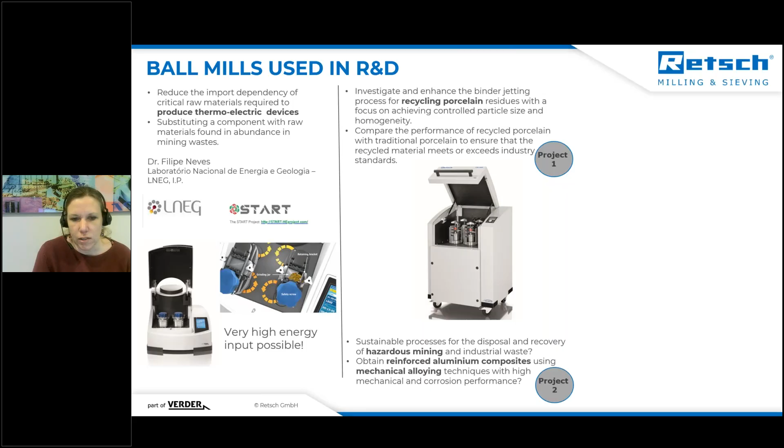So by grinding those kinds of waste, maybe there's the chance to reuse it in aluminium composites by mechanical alloying techniques, for example. And another one uses the TM300 on some waste also, which is very toxic because it may release chromium-6, which is of course very dangerous also for the groundwater. And yeah, by reusing this material, you minimize the risk that it affects our groundwater, and maybe you can also use some minerals coming out from this waste again. So this is a research in this case.

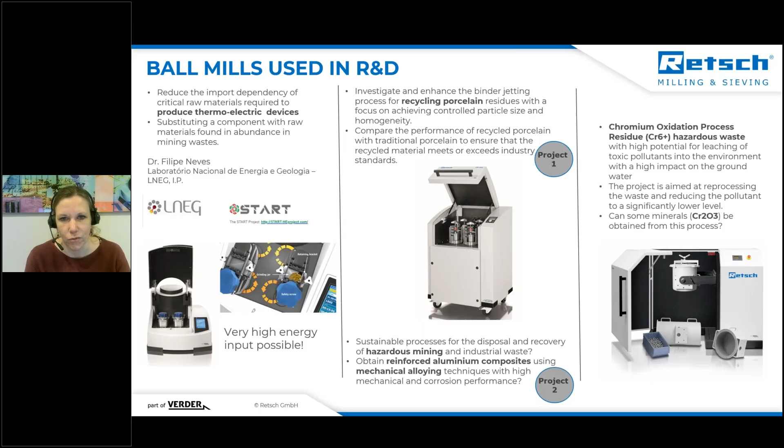So I think these are very interesting and really forward, straightforward, future-orientated approaches.